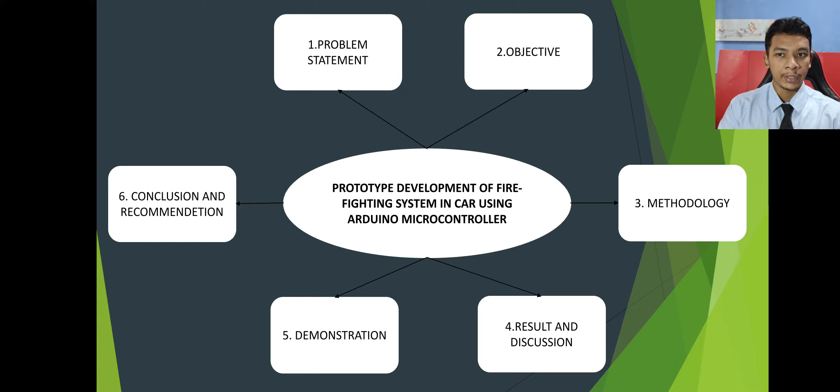This presentation consists of 6 parts. The first one is problem statement and the objective. The third one is the methodology. Continue with the result and discussion. Part 5 will be the demonstration video and the last one will be the conclusion and recommendation. So let's proceed with the first part.

The idea for this topic came from 3 main problems, that is fiery car crash fatalities, lack of research and driver hopeless conditions. Based on research, there were 345 deaths, 1,300 injuries and 1.1 billion in damages from 2014 until 2016 in the US only. How about the world statistic? It is much greater. 5% involve collision and 60% of fatalities reports are from fiery vehicles.

Research also shows there is a lack of research done on this topic compared to firefighting systems for buildings or other high risk places. The third one is driver hopeless condition. Most fiery car cases happen after a collision. The collision may leave the driver or passengers inside the car stuck, faint, and in the worst case dead. Some research also shows a Tesla driver got stuck inside the car because of a malfunction of the door system and died inside the car after the fire happened.

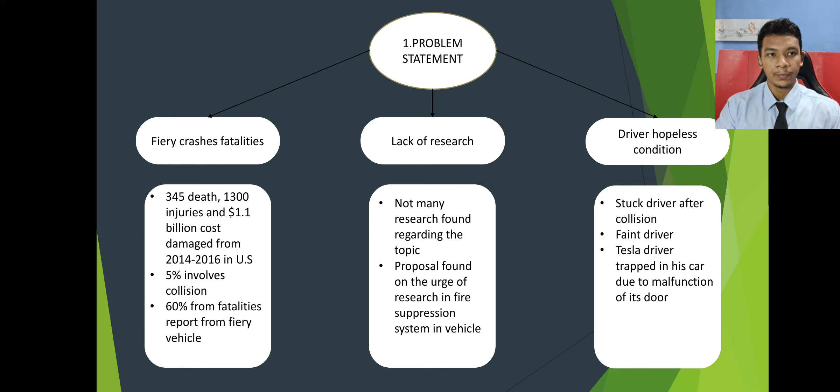That's why the solution to this problem is a firefighting system with separate control and separate power supply put inside the car. We proceed with the next part, the objective. The first objective is to design the CAD prototype. Any type of CAD software can be used, but for this prototype I'm using CATIA V5. The second objective is to develop a complete Arduino program for the system, the third one is to fabricate the prototype chosen in the CAD model, and the last one is testing and analysis of the fabricated prototype.

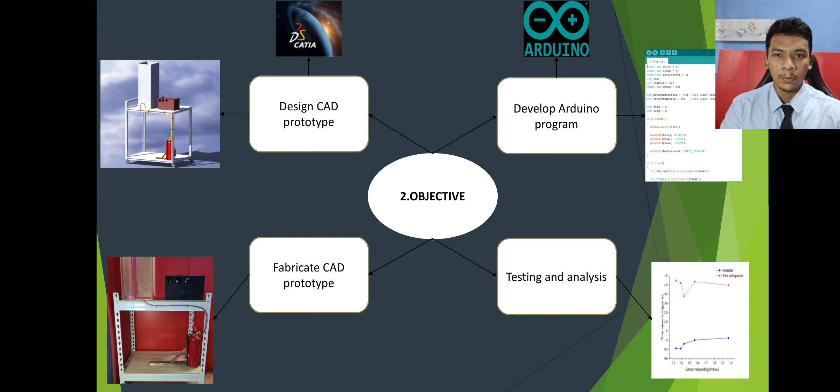To make sure the project succeeds according to the objectives, 4 main parts in the methodology need to be successful. The first one is design stage, followed by system orientation. Only after these 2 parts are complete can we proceed to CAD model and fabrication, because the design stage and the system orientation decide how the CAD model will come out, and then it will be fabricated.

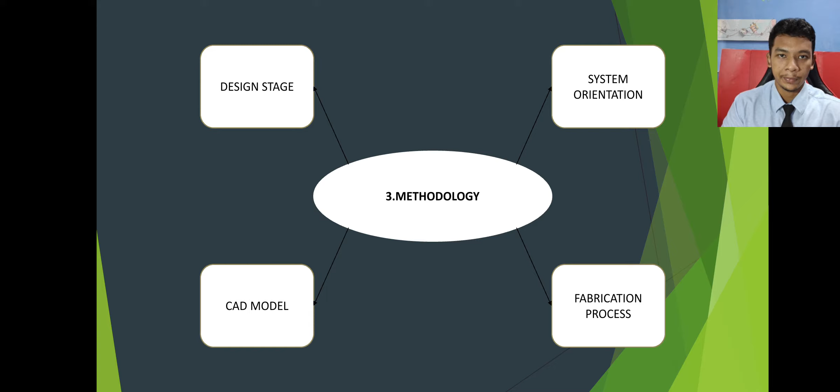The first part of the methodology is design stage. Several designs were made during sketching and random modeling in CAD. The random research ideas and sketches go through the engineering selection process, which consists of conceptual design, Pugh chart, functional benchmarking, and morphological chart. The suitable CAD model comes out after the selection process.

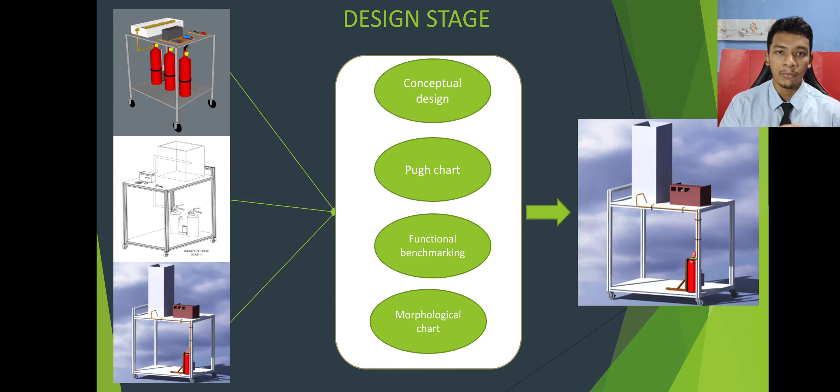The next one is system orientation. This system uses an Arduino microcontroller to move the system. The placement of the electrical parts is important to make sure the system is efficient when the hazard happens. The sensor must be put in the correct place so it will not be easily triggered. The right of this slide shows the system flowchart. The boundary condition for each sensor is set inside the coding, and the sensor triggers according to the set value. The relay activates and becomes a switch to move the linear actuator, and the linear actuator pulls down the lever of the fire extinguisher and deploys the extinguisher powder.

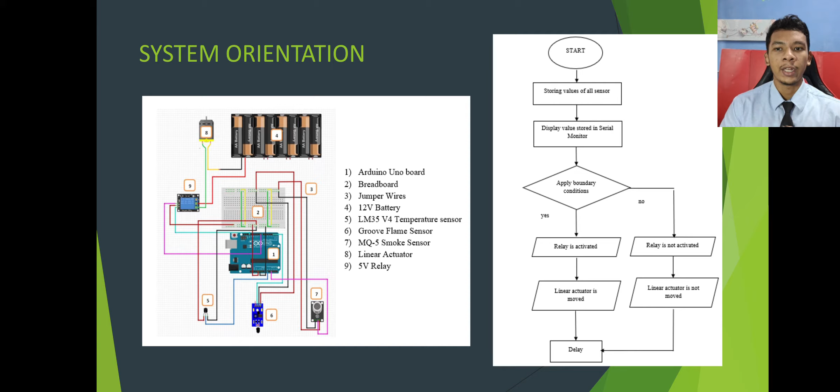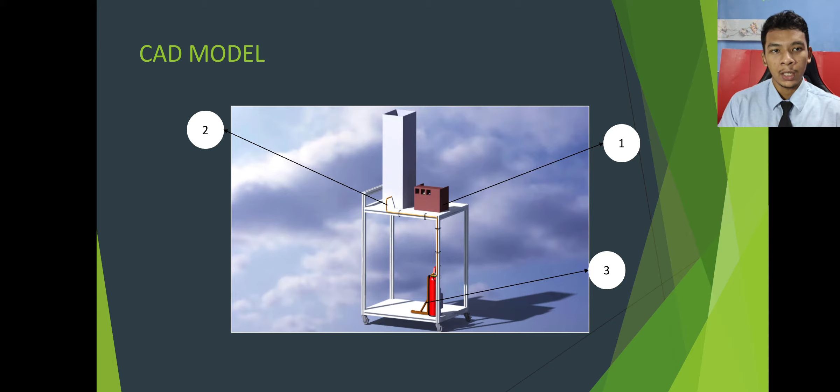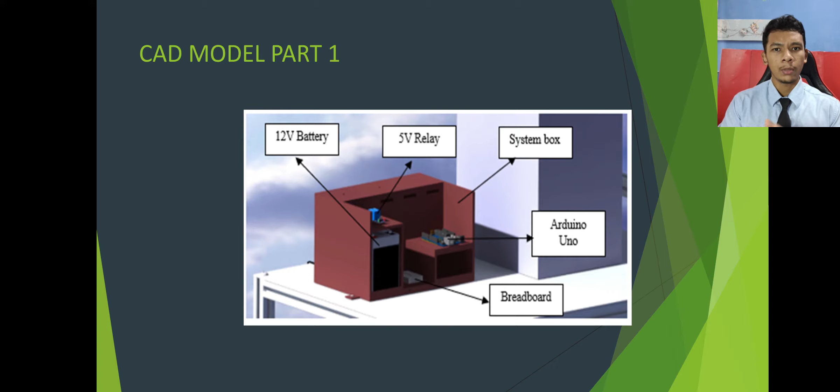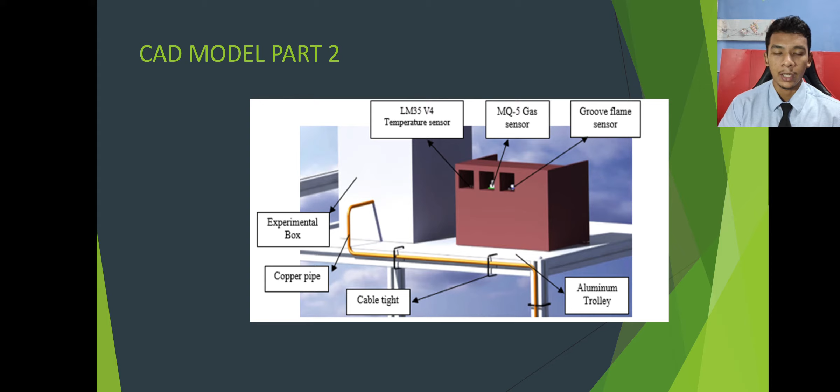This is the CAD model chosen after the design stage and system orientation. Let's close up the view. The first close up shows the system box that holds the Arduino, breadboard, relay and power supply. The second part of the CAD model shows the placement of the sensor, the experimental box where the powder will deploy, the copper pipe that delivers the extinguisher powder, and the aluminium trolley used for the demonstration that acts as a car.

The next part is the extinguisher part system. This consists of a 1 kg ABC extinguisher, an L bracket to hold the extinguisher bracket that holds the extinguisher, an iron cable attached to the lever and linear actuator, and the actuator bracket used to hold the linear actuator.

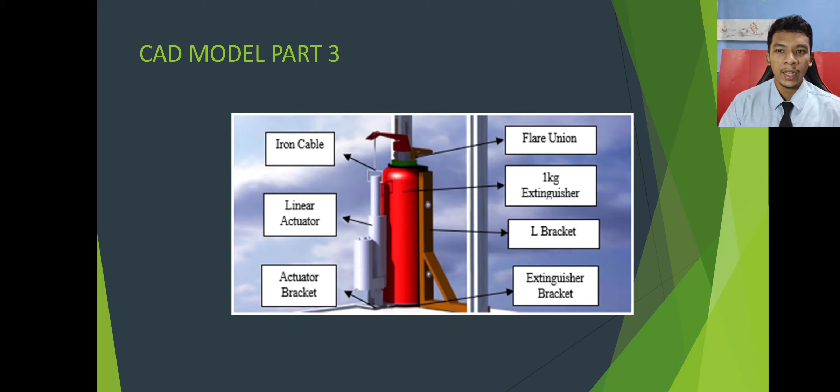The flare union is used to attach the fire extinguisher and the copper pipe. The next part is the fabrication process. Several processes have been done to make sure the actual prototype came out the same as the final CAD model.

The fabrication process included the flaring process used to connect the flare union with the copper pipe, drilling and assembly process to connect all the items with the aluminium trolley, 3D printing to customize the system box, and cutting and bending process to attach the copper pipe and experimental box to the system.

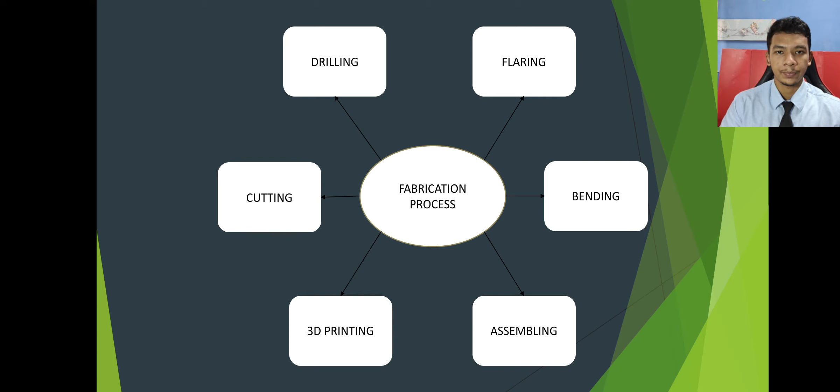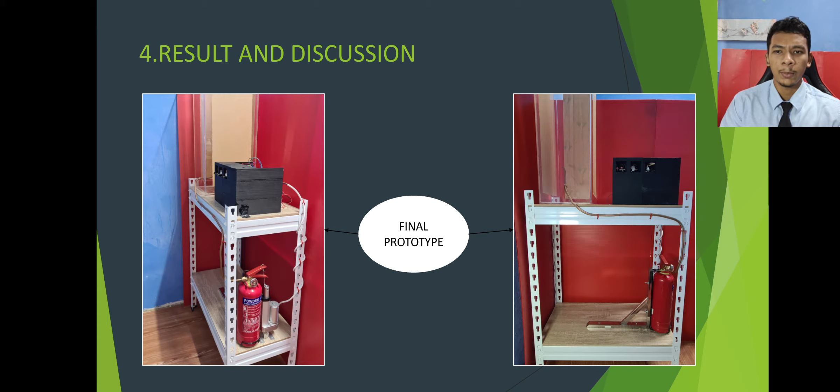This is the final prototype according to the CAD model that has been made. The aluminium trolley cannot be used to run the demonstration right now because the trolley is inside the ITM workshop, and after the PKP students can't return to ITM, so I changed the aluminium trolley to a 2-tier rack to run the demonstration.

This is the simple analysis done to make sure the linear actuator has enough power to pull down the extinguisher lever. Based on the simple experiment, the minimum load needed to move the lever is 40 Newton and the lever will move 10.1 mm. The minimum load needed to make sure the lever moves with full motion is 43 Newton and the lever will move down 26.8 mm. The linear actuator used in this project is 100 Newton and it already fulfills the design requirement.

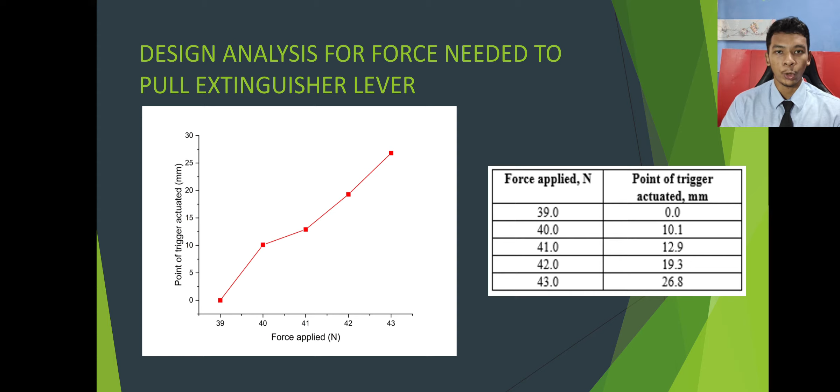This is the performance characteristic for the Grove flame sensor. The sensor has been set to the maximum and the minimum. The performance is consistent because the sensor responds in less than 1 second in every test, making the average sensor response 0.54 seconds and the average actuator response time 0.81 seconds. The average time taken to deploy the fire extinguisher is 3.99 seconds.

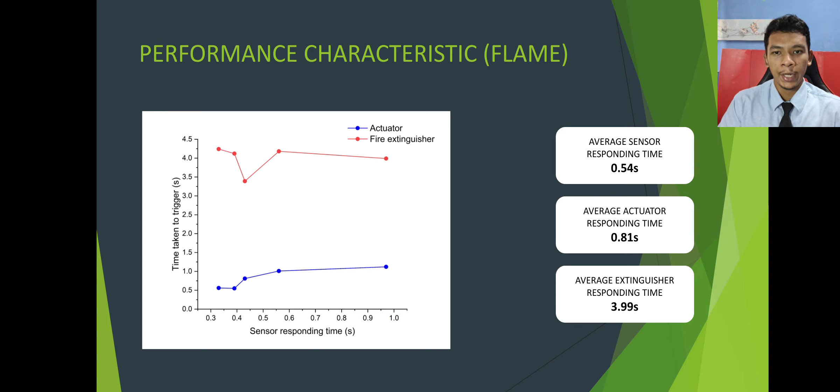The added around 3 seconds between the fire extinguisher time and the actuator trigger is because the spec of the linear actuator is 50 mm stroke. A 25 mm stroke is very hard to get in Malaysia. If using a 25 mm stroke, the average time taken to deploy the fire extinguisher is below 2 seconds.

The next one is the performance characteristic for the LM35V4 temperature sensor. The sensor cannot be set to the maximum and minimum because it is fixed. The performance is not consistent during the test. It may be caused by human error during testing because the distance between the flame and the sensor can't be fixed all the time. The nearer the flame to the sensor, the lower the time taken.

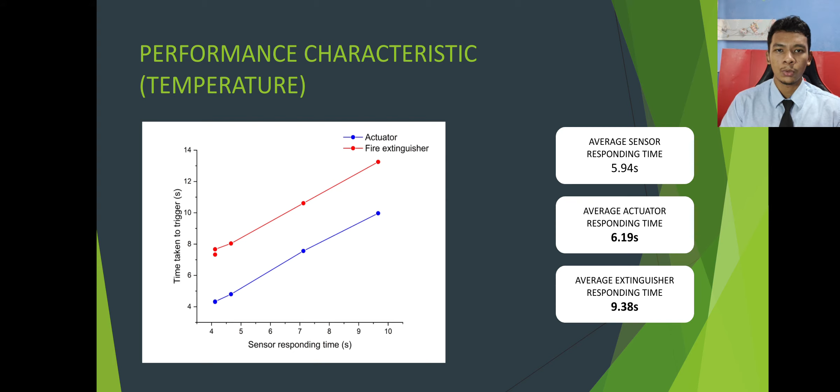The average sensor response is 5.94 seconds and the average actuator response time is 6.19 seconds. The average time taken to deploy the fire extinguisher is 9.38 seconds. Same as the flame sensor scenario, if it uses a 25 mm stroke actuator, the time taken to deploy the fire extinguisher will reduce by around 2 to 3 seconds.

The next one is the performance characteristic for the MQ5 gas sensor. The sensor is set to the maximum and minimum. The performance is not consistent. It may be because the amount of gas is not consistent during the test. The average sensor response is 3.30 seconds and the average actuator response time is around 3.57 seconds.

The average time taken to deploy the fire extinguisher is 6.74 seconds. Same as the flame and temperature sensor scenarios, if it uses a 25 mm stroke linear actuator, the time taken to deploy the fire extinguisher will reduce by around 2 to 3 seconds.

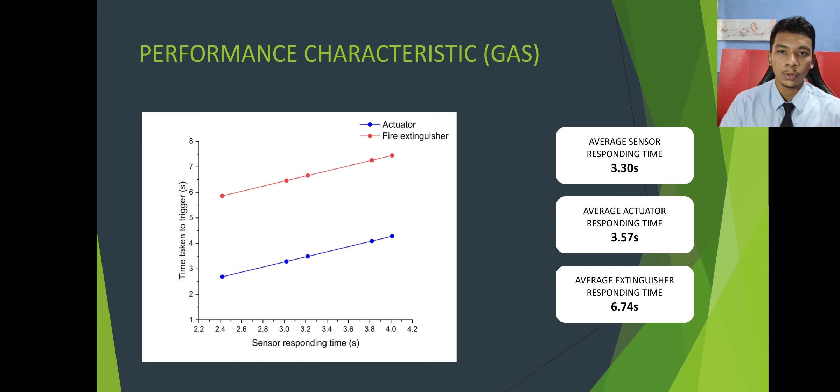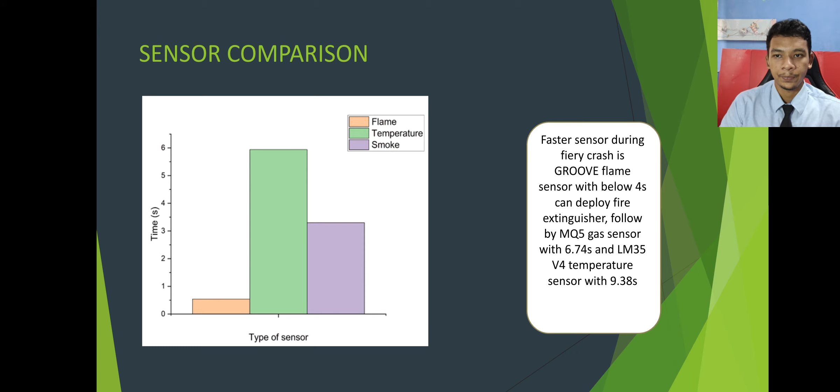This is the comparison between the three sensors used in the prototype. The faster sensor will make the extinguisher deploy faster. The fastest sensor during a car fire crash is the Grove flame sensor, which can deploy the fire extinguisher in below 4 seconds, followed by the MQ5 gas sensor with 6.74 seconds and the LM35V4 temperature sensor with 9.38 seconds. Let's move to the demonstration video.